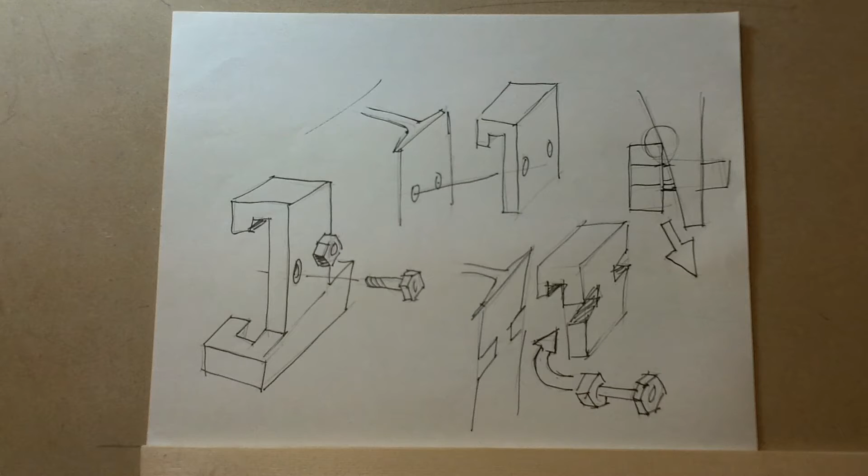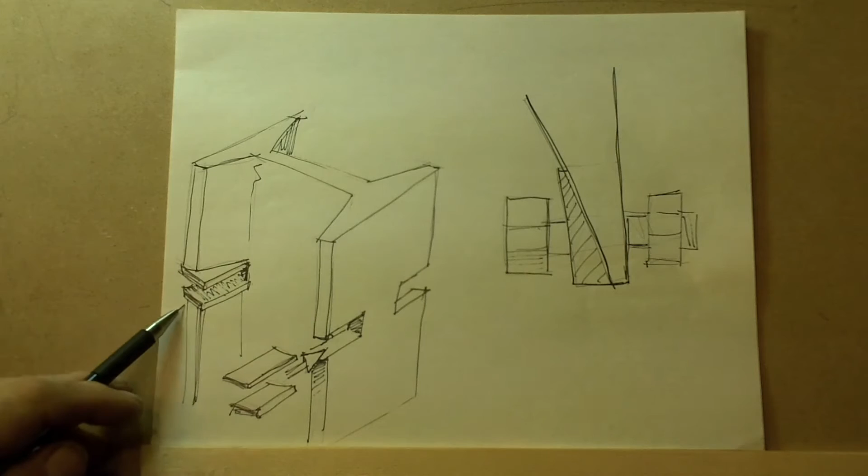My first idea for solving this problem was to simply insert some flat bar into the notch that I had already cut. This would provide a square bearing surface for the bolt. Now this was a design that I was planning to go with when I thought I still had another large H-beam like the one that I used for my anvil base, but I don't.

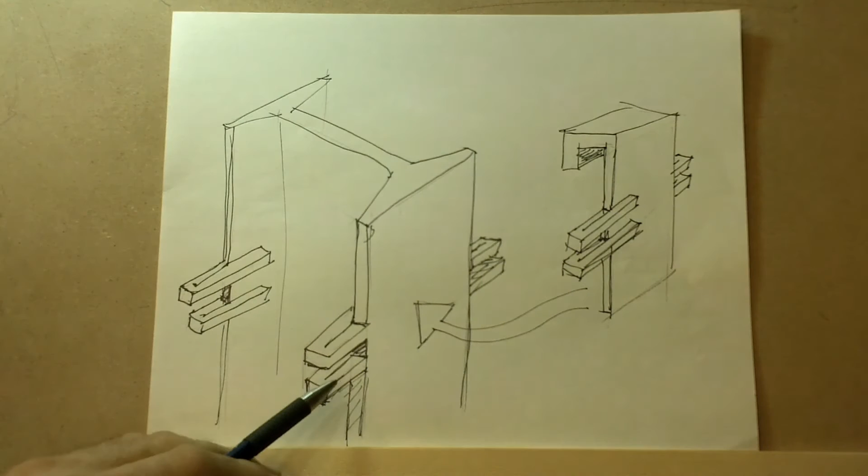All I have are a couple of small I-beams, and I just don't have the room to go cutting a notch on each side and leave anything in the middle that would allow me to mount any kind of a fixture. So I'm going to need to weld up some kind of a configuration like this that will allow me to extend the clamping surface out from the beam.

Now, I don't want to tell you how long it took me to realize that I just reinvented the hold-down system that was used on every milling machine fixture and drill press vise for the last 100 or so years. But that's how it goes sometimes. You get locked into a train of thought and you just can't see the obvious.

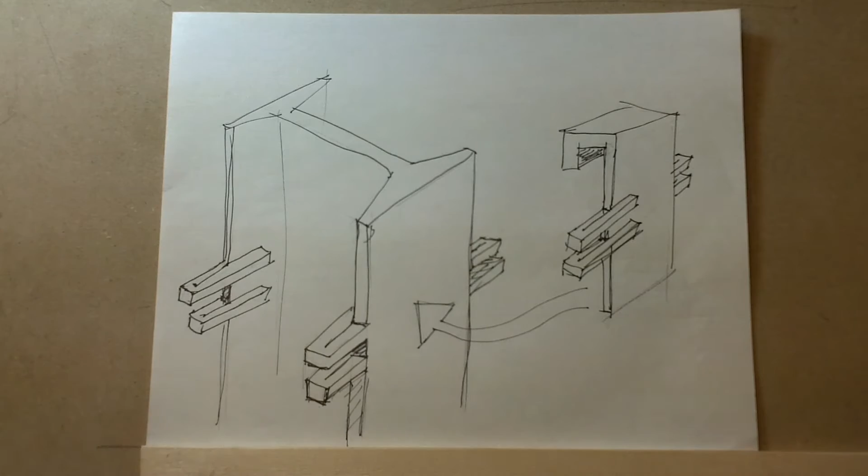That's the main reason it can be more productive sometimes to step away from a problem and let it sit for a while than to keep working at it. It's still the best solution to the problem that I have at hand. It's just kind of funny how I came up with it.

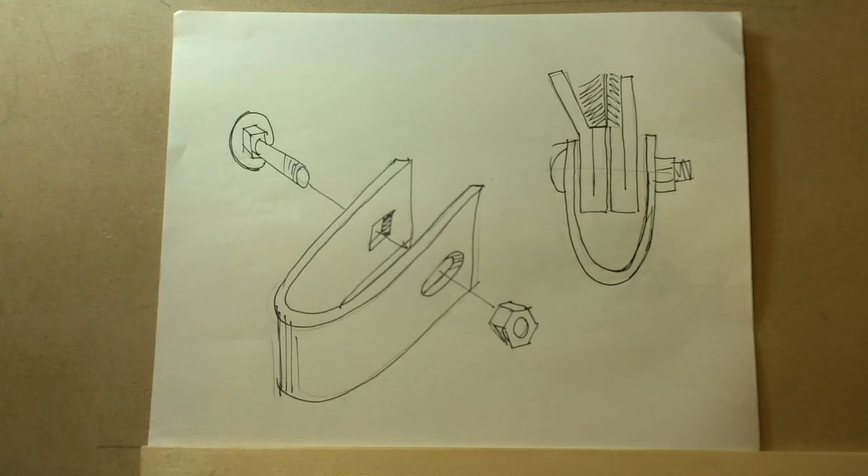The last thing I wanted to figure out was a really simple approach of handling the bolts. Around here the winters are fairly unpredictable. We do spend a lot of time with the temperatures right around the freezing mark, but it's not uncommon to get long stretches where we're well below zero. So if you work outside a lot the way I do, you want to minimize the amount of stuff that you need to do with your bare hands.

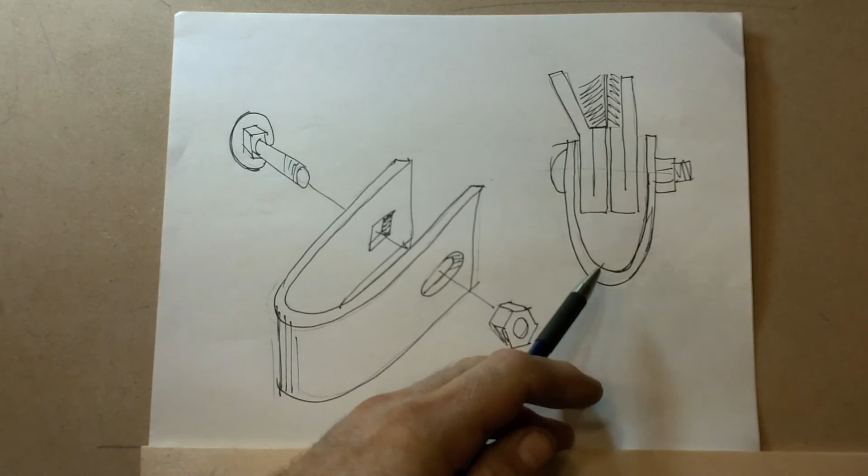This horseshoe-shaped piece of sheet metal replaces the washers that you would normally need to use with a regular bolt system. I plan on leaving a little bit of spring in this piece so the bolts are always under tension. It's a one-piece unit that just slides into place, so it should be fairly easy to install even if you're wearing a heavy pair of gloves or some winter mitts. And this is just a quick sketch to give you an idea of where I'm headed with this.

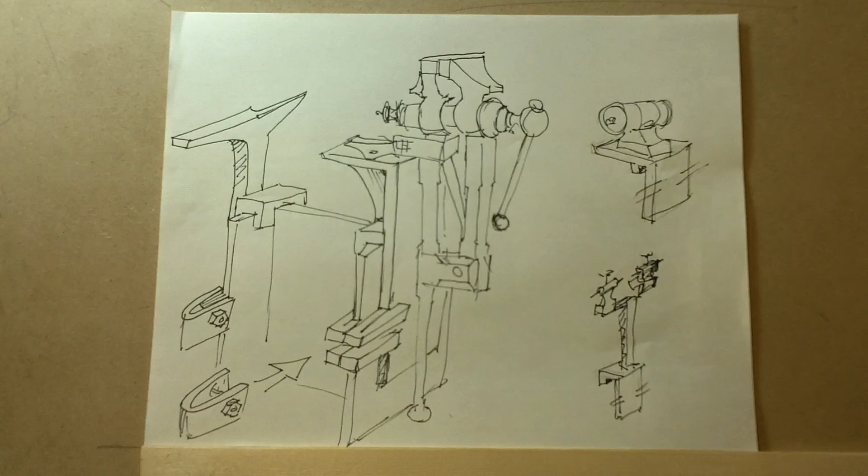So that's all the design work I can do on this right now. Next time I'll be out in the shop and we'll start figuring out how to actually put this together.